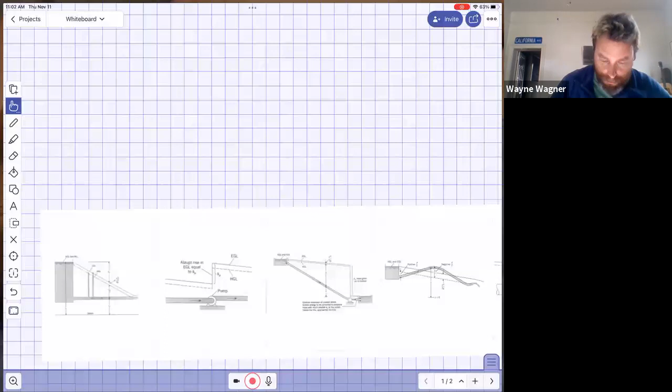Okay, let's go here. All right, so I've got a whole bunch of examples down here, which we're going to get to, but let's start over here.

So the title of today's lecture is HGL, EGL, and that stands for the hydraulic grade line and the energy grade line. We'll talk about that in a second. They always get mentioned together.

Yes, you're a very good dog, but I can't go right now. I might be playing fetch with my dog over this.

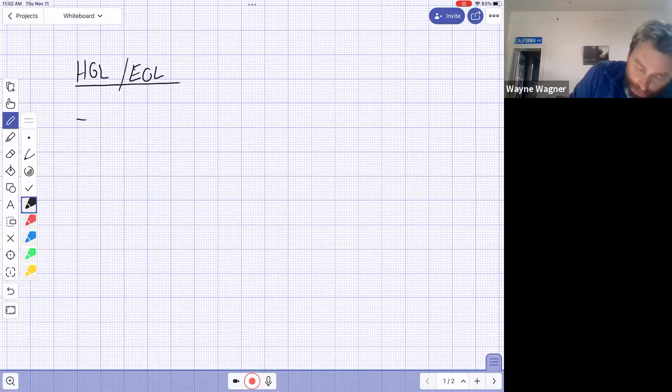Okay, so the purpose of today is we're going to construct the hydraulic grade line and the energy grade line for various fluid systems.

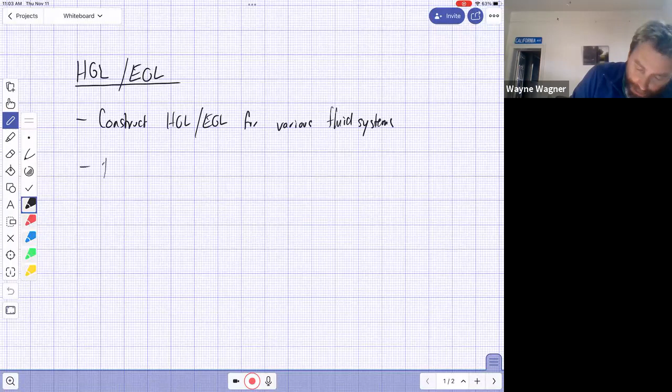And then we're gonna define and explain the physical meaning of the HGL, EGL. This is kind of all part of the same thing.

One thing I made a note of here, and I don't really remember why, but for some reason this needs to be known now. So we're just gonna go ahead and put this, just as an aside, I guess.

Okay, head loss. Remember, head loss is just you lose energy due to friction, or viscosity, or whatever the reason may be, in an expansion.

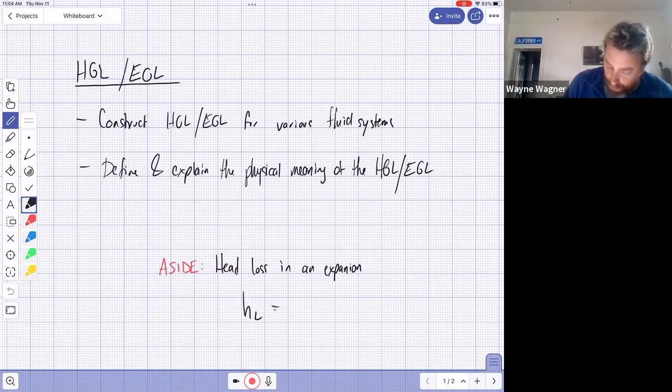And that is defined as head loss equals V1 minus V2 squared over 2G. So that's just something, I don't really know where that's going to show up. I just have it in my notes and wrote it down right here. So it's important that we have that. I don't remember why.

All right, so basically what we're gonna get to here is the reason why. So there's a few different ways you can write the Bernoulli equation. I even put that in one of your homework assignments, like what does it look like if everything is written in terms of pressures, or everything is written in terms of lengths, or everything is written in terms of energies, or whatever.

And right now we're going to talk a little bit about why we always think about it in terms of heads, okay, or lengths, I guess. So one of the ways... Okay, can you guys still hear me? I'm sure you can, right?

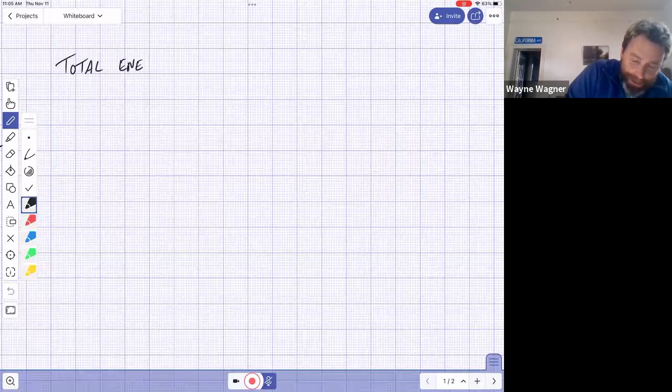Yes, okay good. Okay, so I tend to think of this as like the total energy in a system, as being, well let's see, TE equals P on gamma plus Z plus V squared on 2G.

So you remember this from the Bernoulli equation, and we've been using it in the energy equation. This quantity right here is often just defined technically as the EGL, energy grade line. So the energy grade line is just your total of these three things. But it's not really energy, but it could be converted to energy by just some algebraic manipulations.

It's just, we're just keeping track of our three forms of energy, essentially: potential energy due to pressure, potential energy due to elevation, and potential or kinetic energy. So we're basically just keeping track of these three things. Okay, the total energy in a flow generally...

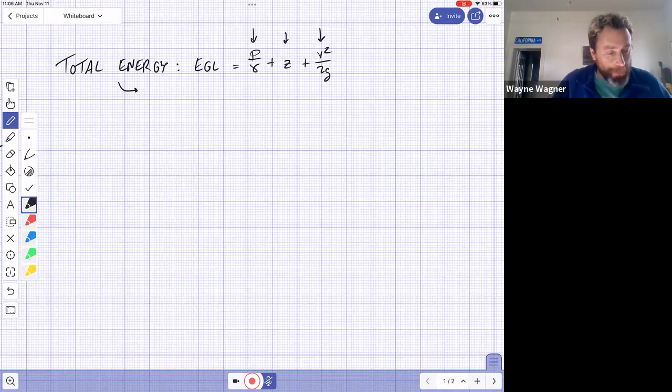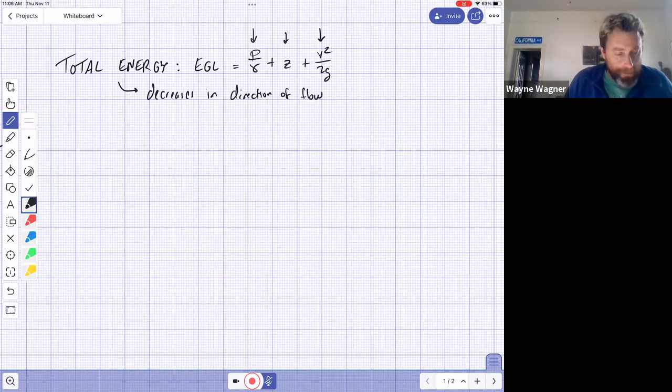It decreases in the direction of the flow. Okay, why would it decrease? Why do we lose energy in the direction of the flow? Is it friction? Friction, right, due to head loss.

Okay, so you got friction, you're gonna lose energy. That technically you're losing the energy due to heat. It's not really a lot of heat, it's not really gonna heat up your water or your fluid. I guess it depends on how little fluid you have, but generally in the direction of flow it decreases unless... what could cause the amount of energy to increase?

If it's flowing to a higher area or a higher height, it would... No, because if it goes to a higher area, then what's gonna happen is it's gonna lose pressure or it's gonna lose kinetic energy. So it's either gonna slow down or it's gonna lose pressure. I guess inside a pipe, it'll just lose pressure.

But good thinking. Could I have a pump? Pump, yep, unless there's a pump.

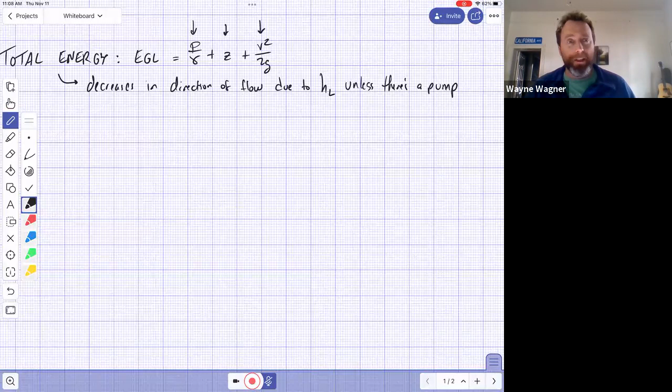A pump, okay, so unless you add energy to the system from outside, it's always losing energy. That's not just a fluids idea, that's a general idea of all the physical world. Unless you add energy to the system, it's always going to lose energy.

So this is the total energy, and that's the EGL. You're going to have some piping system, and we draw the energy grade line, a line describing how much energy you have at every location. There's another line we like to draw, the HGL, which is just the piezometric head. We don't use that term as often as I'd like.

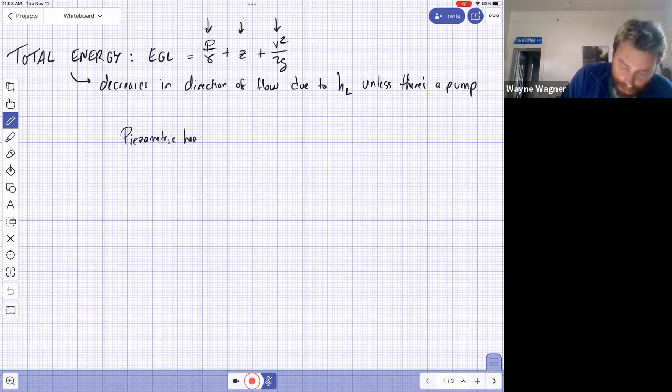The piezometric head, that's P on gamma plus Z. That's just the potential energy of the system, and that's the HGL. I'm going to erase the word piezometric head.

I'm going to write HGL, the hydraulic grade line. Now I'm going to give you an idea of what all this is. One key to remember is these are all measured in units of length, meters or feet or inches. P on gamma is a length, Z is a length, V squared on 2G is a length. It really makes plotting these things nice.

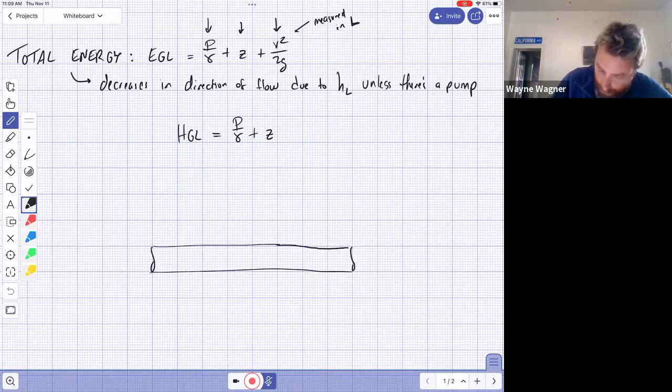So one typical way we do this is we imagine we've got a pipe. Actually, I don't know if this is a typical way people do this, but it's the way I like to think about it. We've got a pipe, and I'm going to put a little piezometer right here.

So I'm just going to consider this system. I've got a pipe going right here, and let's say I've got a little piezometer right there, and a little piezometer right here. Let's take some points here. The first thing I need to know is I'm going to keep track of three quantities.

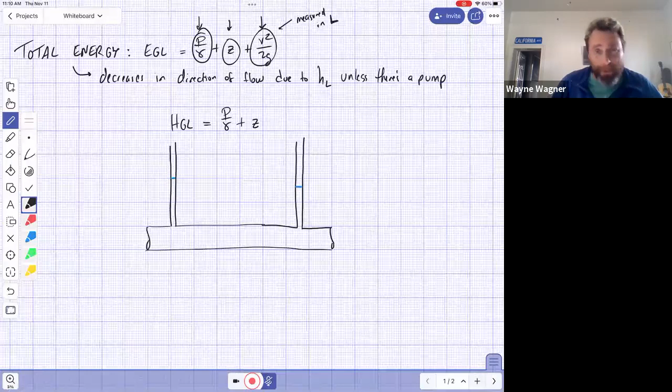The Z in the system, well, in order to know Z, we need a datum. I should be doing this with a ruler, it'll make my drawings much better. Let's go ahead and do a ruler, plus I noticed in the videos it makes a really cool noise.

So here's my datum. If I decide this is my datum, and I'm curious about a location right here, this is Z. Z is easy to figure out. That's Z. Suppose I'm looking for a point right here, this is Z.

Now Z is the easiest one. Now I want P on gamma. Well, we could use hydrostatics and do some manometer rules if we wanted to, but it's easier to just remember this: this is P on gamma. If we wanted to do manometer rules for that, let's see here.

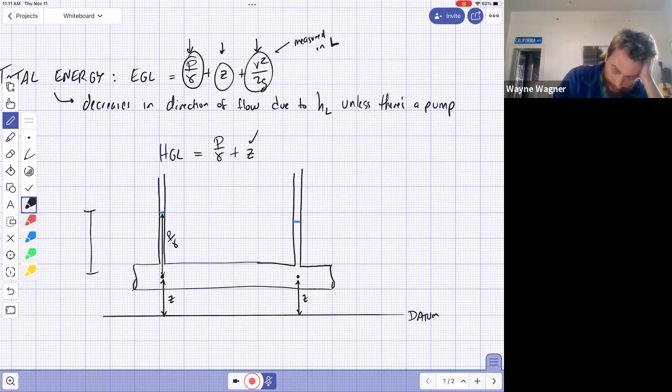So this distance right here, up to there, if we call that H, we can say okay, I'm going to start here. Got P atmosphere, I'm going to do a manometer rule. So I'm going to add as I go down gamma times H. That's going to give me the pressure at this point equals the pressure at that point. If we make this gauge, it goes away, and then I end up with H equals P on gamma.

So this height right here is P on gamma. Does that make sense?

Yes. I'm hopeful that this manometers stuff is becoming second nature. Lord knows we do enough of them in this class, they show up again and again and again. You guys as a class have done better on manometers than I think I've ever seen in my classes, so you're to be congratulated on that. It fires me up.

So anyway, here's P on gamma. Now the next thing I need is V squared on 2G. I don't know what V squared on 2G is for this problem, there's no real way to know, I'd have to just make something up, and we will. So what typically happens, if you remember, we talked about pitot tubes. I'm going to draw one out here, only because P on gamma is in the way. But if I imagine I've got an opening right here.

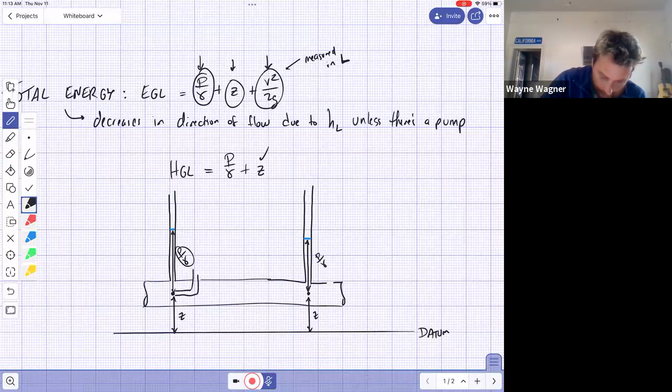But anyway, so this is now going to raise, it's going to be above. This is where P on gamma is. It's going to be above that by a certain amount, and that amount is V squared on 2G. So maybe that pushes the water up to here.

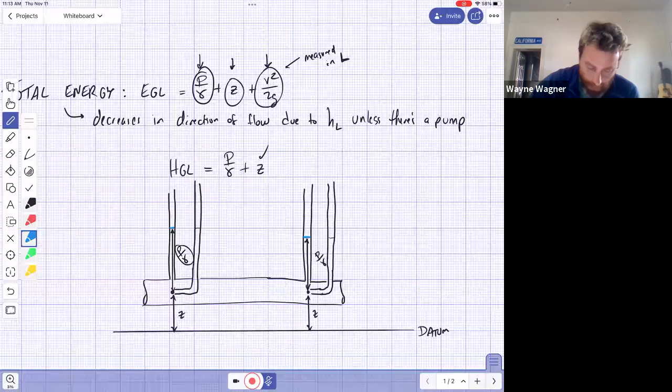And so what I know about V squared on 2G in this case is that this pipe has the same diameter all the way through. Because of that, I know it has the same V squared on 2G over here. So maybe that jumps it to about right there. Now I've got this distance right here, that's V squared on 2G. This distance right here, that's V squared on 2G.

Well, I guess technically it's defined right here because that's the point. Okay, sloppy drawing. Anyway, give me one second, I got to fix this drawing. Why does it keep giving me the wrong eraser? All right, so what I'm going to do is just slide this over, so it's going to come in right here and go up this way.

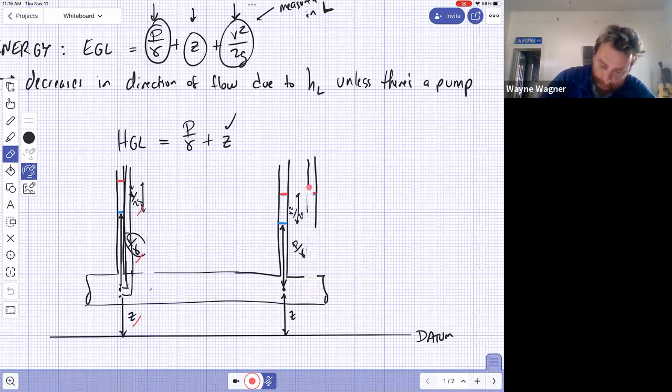That's our V squared on 2G. Do the same thing over here. I think you get the point, but I didn't want these to be at different locations because that kind of screws everything up. Okay, so like right in there, maybe. Oh no, it was right there. Okay, sorry about that, that was red, I believe.

Okay, so we're like right in here. All right, so this is the EGL right here, because that's the sum of the Z, the P on gamma, and the V squared on 2G. This is the EGL right here. And if we assume, as is generally a pretty fair assumption, that we're kind of losing that energy at a steady rate, it looks like this.

Okay, so that's the EGL. The HGL, okay, it looks like this, right? We're just going to connect the blue lines, because it's everything except for that V squared on 2G. So this is the HGL.

All right, so the difference between these two is V squared on 2G, which in this case I know is a constant because the diameter of this pipe is constant, so V squared on 2G has to remain the same. Notice the elevation here, the Z's, it was constant because this pipe was horizontal. So all that energy we lost in terms of head loss, going from point 1 to point 2, it had to come out in the pressure. So we lost energy, and really it showed up in the pressure.

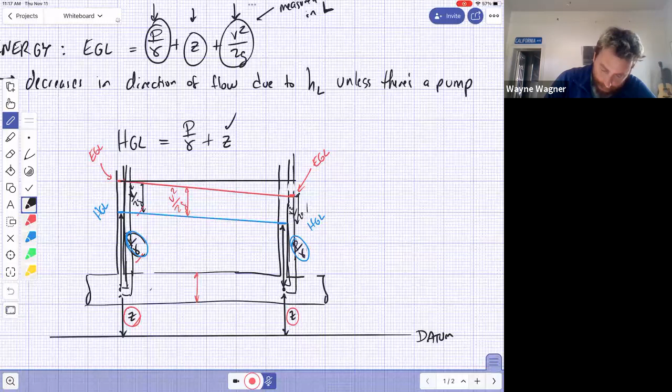How much energy do we lose? Well, the easy way to get at that is to draw a line perpendicular, horizontal, like this. And this right here, this is the head loss. That's the amount of energy that we lost.

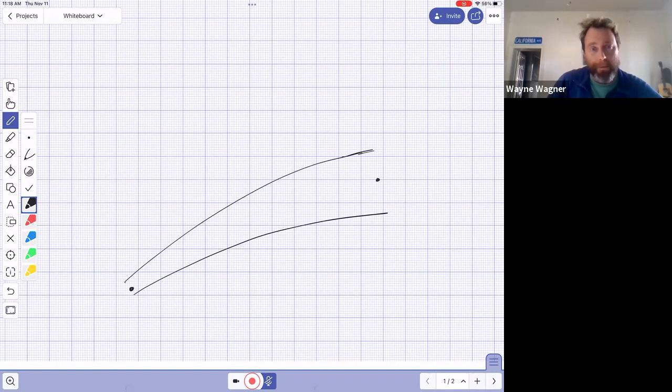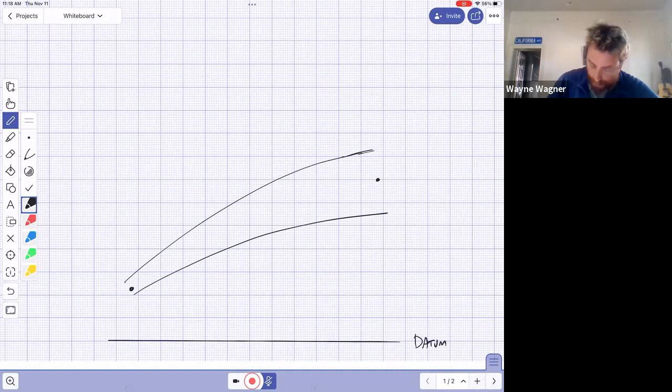Okay, so this drawing, this is the easiest this would ever get. It'll almost never be this easy. I'm going to draw you a slightly more complicated version, with a pipe—I can't remember how I draw this pipe, but it doesn't really matter. Let's suppose we've got a pipe that looks like this, gradually getting larger, going from a point over here to a point over here. Okay, so let's see what we've got here. Here's the datum. Here's Z.

Okay, now the pressure. Well, I don't really know, I'm kind of making up ideas here. One thing I know is that I'm going to lose energy in the system, right? So the EGL, wherever that is, let's suppose it starts right here and goes to some point here. I know I'm going to be losing energy, so the EGL has to go down. Technically that line would actually be concave up, but we'll deal with that later, let's not deal with that just yet.

The pressure down here. So the other thing we know is, sorry, I always work from the top down. So this is my EGL. Now this is a closed pipe, so the velocity down here, the velocity head is going to be really low. Low V squared because it's a rather large pipe. So if V squared is low, then the distance down to here, this V squared on 2G down to the HGL, means these things are going to be relatively close to each other here, and relatively farther away over here.

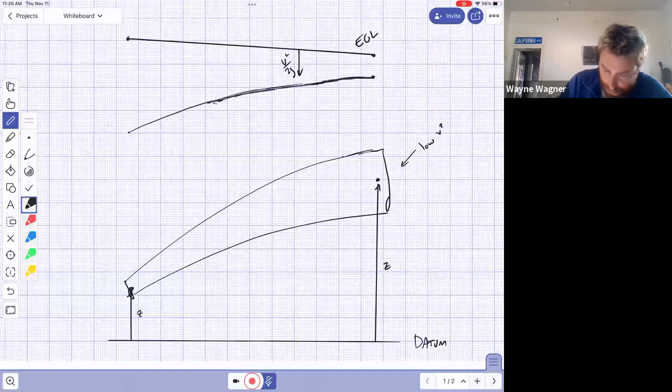So maybe right here, this is going to look like, imagine I put a little curve in there, but not too much curve. What I care mostly about is that you guys get, well, we'll talk about concavity later. Okay, so this is your HGL. The difference between those two, and the way you figure that out, is by doing V squared on 2G. Notice it's slow moving over here, so that means this is small. It's fast moving over here, so V squared on 2G is large.

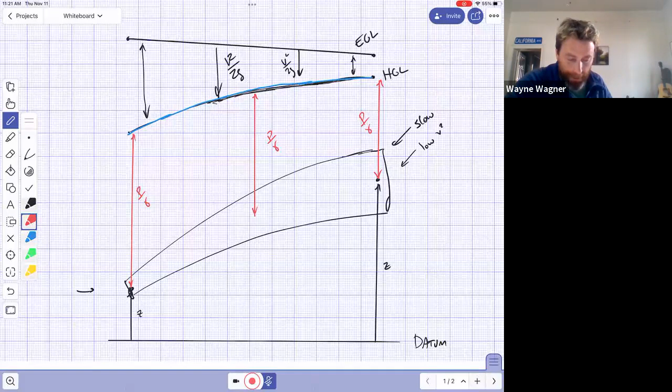So what does that leave in the middle? Pressure. Here's our P on gamma, and obviously it could be right here. So now we've got our three things that add up. Here's our HGL, which is Z plus P on gamma. And then the EGL is everything: Z plus P on gamma plus V squared on 2G. That's how we figured this out.

Now what I want to note that's kind of interesting about this is a few things. So here's our Z down here. Note that if I were to move directly upwards in this flow, let's suppose I was right here, my Z would increase some, and my P on gamma would decrease. I'd have the same amount of energy, it's just that it would be in elevation instead of pressure. And this V squared on 2G at those two points is the same, still the same V squared on 2G between those two locations. So moving vertical doesn't really affect it.

You know, Rocky, shh, we don't need growling. Growling is for mean dogs.

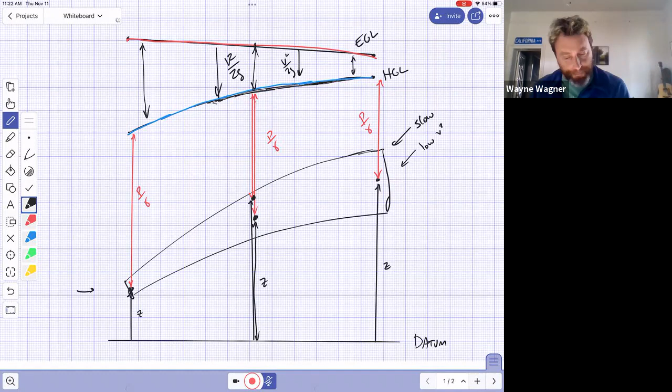Hey, stop. Okay, so that's the idea behind these things. So when you have to draw these, today we're just going to look at a bunch of pictures, but when you draw these, what I recommend is draw the EGL. Usually that's pretty easy, right, because basically it's just going to slowly drop. Give yourself enough room to draw underneath it, but it's just going to slowly drop.

Unless there's a minor loss, and we'll talk about that in one second, unless there's a minor loss or a turbine, in which case it will drop fast, like in a discrete step. And then you draw HGL, by just imagining or calculating, depending on the problem, V squared on 2G. Last, draw Z. Once you've got those three, then you've got everything in the whole problem, everywhere, which is pretty cool.

Okay, so today we're just gonna look at a bunch of pictures. I think next class, can we do all of that in one class? Probably not, but we'll talk about that.

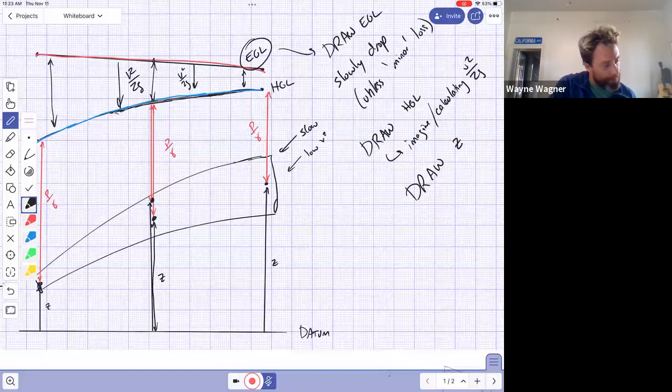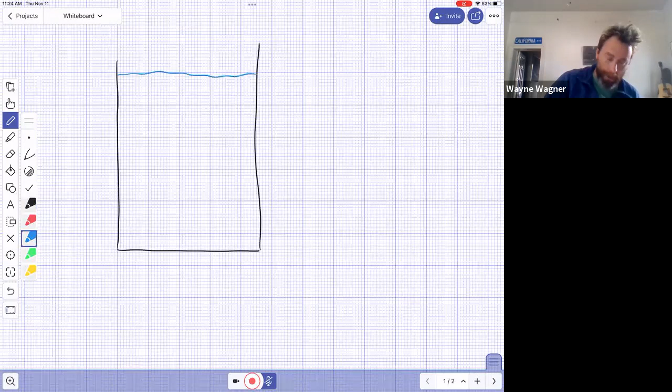All right, so let's go down here. These are from a different textbook, a textbook I used to teach out of. Okay, first let me start with one thing real quick. If you have a reservoir in your problem, so if at the beginning of your problem you've got a reservoir, if anywhere in there you have a reservoir, I don't care if your point is here or here or here or here, right? V squared on 2G equals zero.

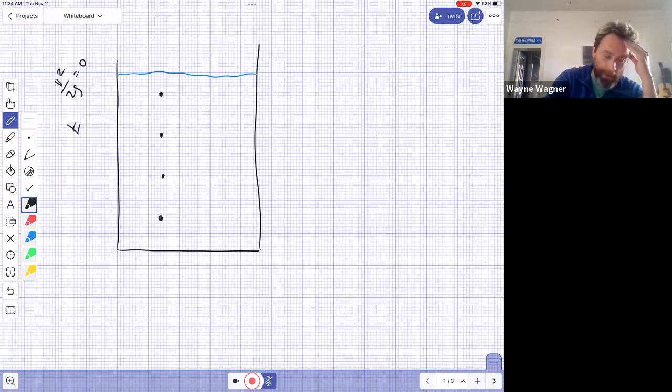Okay, which means if V squared on 2G equals 0, then V squared on 2G is the difference between the total energy for the energy grade line and the HGL. So this means the EGL equals the HGL.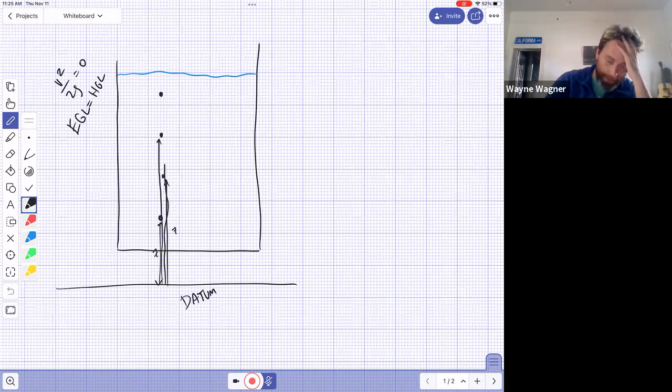Okay, which means if I draw a datum down here, then this is Z for this point, this is Z for this point, this is Z for this point, and this is Z for this point, right? Easy enough. And that also means that this is P on gamma, this is P on gamma, this is P on gamma for that point, and this is P on gamma for this point. Okay, it doesn't matter, right? They all add up to the same thing.

But what's interesting here, of course, is that, look, you're higher in the fluid, so you have a lower pressure. Okay, which is kind of what we would expect. So in this case, the HGL and the EGL both are right along the surface of the fluid.

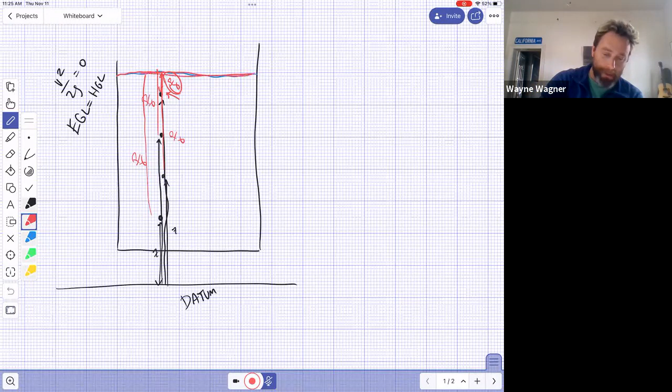So let's go over here and let's start talking about what that means. All right, so HGL and EGL. And please interrupt me because this is complicated enough. So what we're going to do is, I guess we should just be kind of standard here.

Let's make the EGL in red. EGL's in red. So I'm going to draw the EGL first. And I want you to kind of follow along with me and make sure that this makes sense. All right, EGL is right here.

Okay, now the fluid starts to move. I don't lose any energy due to friction or anything, or head losses, until the fluid starts to move. Okay, technically it starts to move a little bit before this entrance. If I had created this drawing, I would have made it kind of start to dip down right here. But, whatever, I'm not going to get that worried about that. We're just going to kind of follow along with the way the books do it.

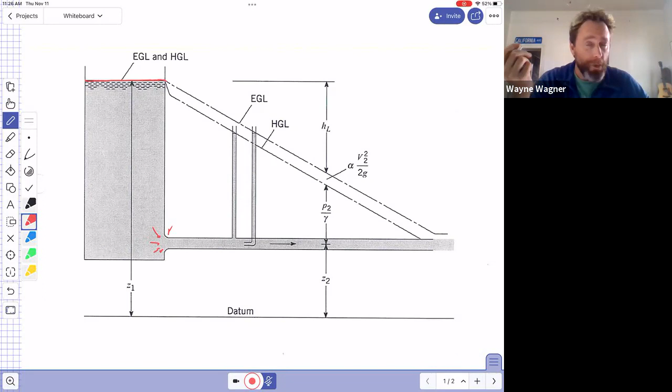So you get to this opening and now your flow is moving. So because your flow is moving, you're going to start to lose energy. Well, there's nothing different about the pipe here versus here versus here versus here versus here. So you're going to lose energy at a steady rate, and so we're just going to start dropping.

Okay, now the question is, how do we know where to end up over here? Like, why did they draw it with that slope? Why didn't they draw it with a slope like this, or a slope like this? Because it can go negative, and we'll talk about that in a little bit. But how did they know what to do?

And so what they did is they went down to this end point and they said, well, where are we going to end up? Well, this thing is exiting to the atmosphere.

Okay, so if we consider these things, P on gamma, Z, and V squared on 2G. Okay, when it's exiting into the atmosphere, this thing goes away. Okay, we still have a Z.

In fact, let's go ahead and draw that in here. Okay, they've already created the datum for me, so we'll just go ahead and use that. And then we've just got this V squared on 2G above that. So V squared on 2G, this has to be positive because it's a V squared on 2G. So they just said, well, this is going to be V squared on 2G, and that's the spot we're going to aim for.

Okay, when we draw this line, okay, so what is V squared on 2G? Well, if I asked you to draw this and I gave you no other information, as long as you ended up above this line, above this location, I would have to accept it. Okay, because I didn't give you any information.

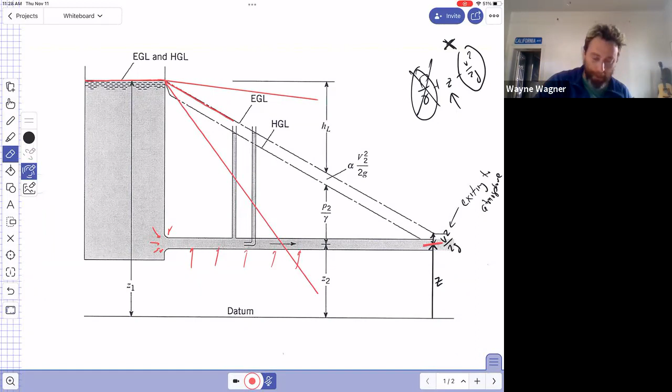This line right here would be totally wrong. Okay, but this line that I'm erasing now would be fine. You know, that line would be fine. I can't quibble if there's no information.

So basically we're going to lose energy and we're aiming for a spot V squared on 2G above that and Z. Okay, now, as long as you're above that and Z, and I don't give you any information, well then I have to accept it, right? Okay, so now this V squared on 2G, okay, so that's how you draw the energy grade line.

Okay, now a few things, yeah, that's fine.

You'll note the head loss in this case is really huge, right? We lose a ton of energy due to head loss. I'll explain that in a sec. Well, I'll explain that right now.

Before we get to that, what if we did not lose that much energy? Like, why do we have to lose that much energy? Well, what happens is this: your head loss, the amount of energy you lose, is a function of velocity. So the faster you go, the more energy you lose.

So if you didn't lose a lot of energy, let's imagine you lost very little energy in this problem, and so you ended up in a location like this. When you exited, you just had this insane surplus of energy.

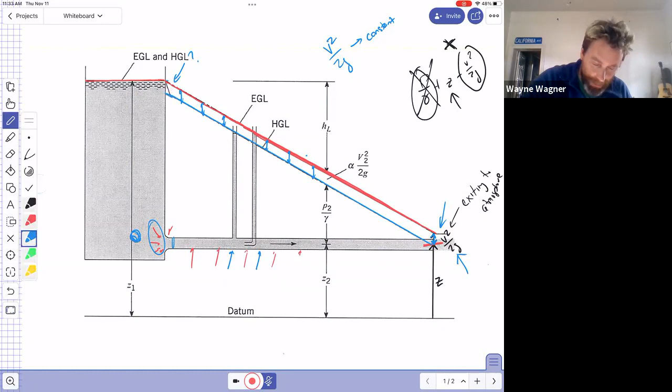Well, what's happening is that V squared over 2G is ramping up. It's going from zero velocity to whatever the velocity is in the pipe down here. I don't particularly need you to draw this little bit. Usually when I draw this, I just have it go in like this and then just draw a little drop off like that.

Technically, and they don't draw it in this picture either, but technically there is a head loss right here, which we're going to call h with a lowercase l. There's a head loss right here, which means you lose a certain amount of energy because the flow conditions are changing. So anywhere where there's something, in this case an entrance, there will be a head loss, and that's what we call a minor loss.

And we'll talk about those as we go. But in these drawings, they never draw an entrance loss. I will ask for you to show me the entrance loss.

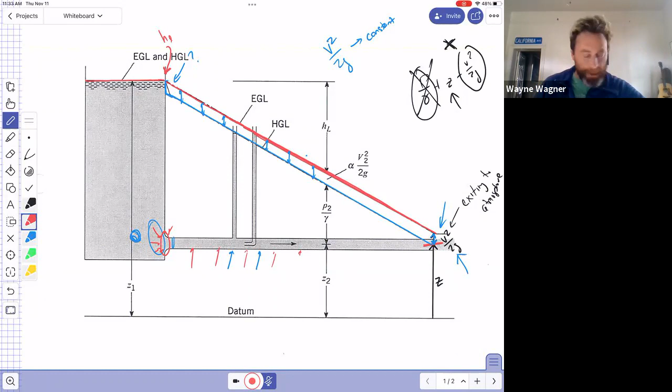So what you'll do for the entrance loss is it'll look like this. This is your EGL, and you'll be like, oh, there's a head loss right here. Boom, there's a head loss. And now just draw it as before. Okay, so this is a head loss.

It's just an acknowledgment. I want you to acknowledge, I know that there was some kind of changing in the piping system. Something happened. If something happens, there's a head loss. Again, it could be anything. You could change from one type of pipe to another. You could have a fitting, you could have a valve, you know, whatever.

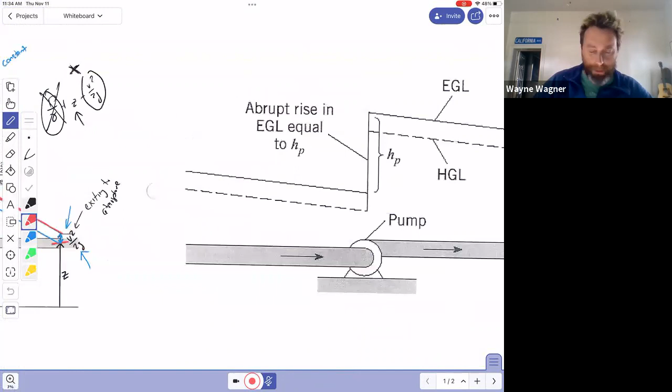And we'll talk about all those things as we go through today. Okay, here, this is what happens if you have a pump. Okay. Oh, wait, any questions on this? No, sir. Okay, cool. All right.

Let's see this one. All right, so we've got a pump in your system. So this is one of the ways that they'll draw a pump. And again, your energy grade line, we're going to assume these pipes are the same. So you're going to have this constant loss of energy.

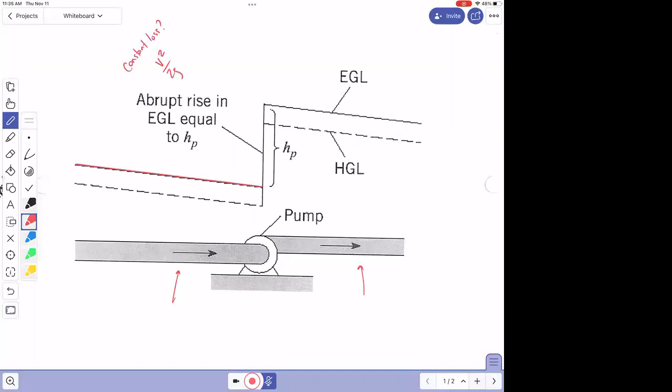Boom. Now, how do I know it's a constant loss of energy? Okay, well, there's two ways I know. One, V squared on 2G is constant. It has to be, because this diameter of pipe and this diameter of pipe are the same. Okay, any other way? If one of the velocities was higher or lower than the other, it would break the conservation, it would break continuity, law of conservation of matter.

Okay, staring at the drawing now, it suddenly doesn't look like they're the same, but let's assume they're the same. The other thing that we know is that if they're the same pipe, the friction on the sides is the same. So if this one's made of concrete and this one's made of concrete, and they have the same velocity moving through them, then they're going to lose energy at the same rate. Now that won't be the case if this one were made of glass, for example, because then all of a sudden you've got a much smoother surface. It's going to be less frictional, and you're going to be very happy.

All right, so here's my EGL. So what happens is we hit the pump, and what I want you to think about when we hit pumps is, okay, that means basically I'm just adding energy. Okay, so this EGL. Don't worry about the HGL. Don't ever worry about the HGL until you've drawn the EGL. That's going to be the rule. I should just say that 50 times a day. Don't worry about the HGL until you've drawn the EGL.

So here's the EGL, it bumps up, right? So usually what you'll do on your diagram is you'll label that HP. So if the pump adds 50 feet of head, then HP is 50 feet and this line goes up by 50 feet. And then of course, we're going to start losing energy again because we're just flowing along a pipe, same diameter pipe, made of the same stuff. We'll talk about how to figure out exactly how much it loses. We'll get there.

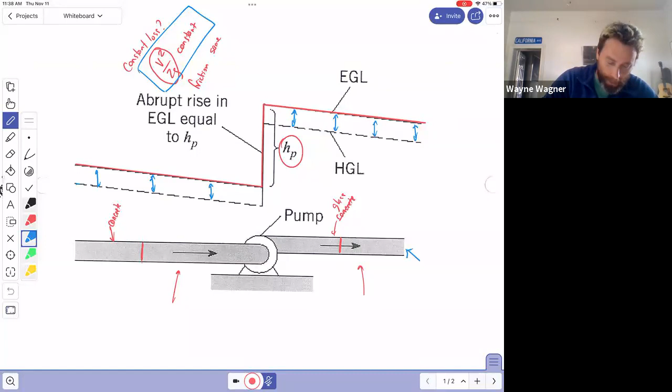I did that for many years. I even started teaching this class that way. And then I realized, whoa, if you have the EGL, the HGL gives itself to you. These are all the same number. It has to be. It's the same distance because it's a constant diameter pipe. So then all we need to do is draw a line that is the same distance away from the EGL the whole way. Okay, and that's what we're going to do.

All right, so there you go. That's our HGL. Now what does this tell us? It tells us some really cool stuff that I find very interesting because it's surprising to me.

V squared on 2G is constant. That's a surprise because normally when you think of a pump, you think the fluid is going to come out much faster than it went in. But unfortunately, that's not the case. It can't do that. There's nowhere for the water to go.

But what it does instead is notice, so if I draw a datum, here's my datum. My elevation is relatively constant before and after the pump. It does look like the exit pipe is a little bit higher. So this is my Z.

And then my P on gamma. Notice my P on gamma, my pressure was decreasing all along the pipe. This is my lowest pressure right here. And then all of a sudden we get the pump and boom, my pressure goes through the roof. So what the pump often does is it really just increases the pressure.

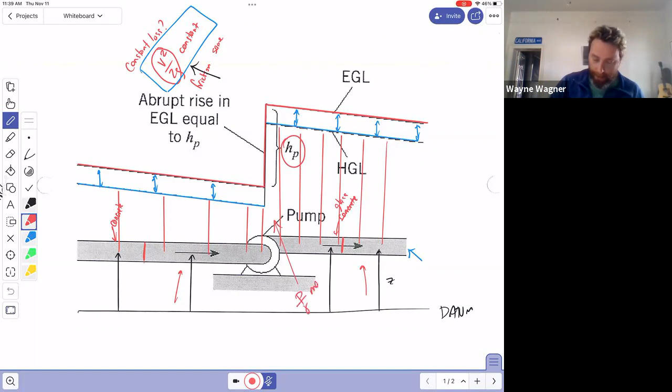So your max pressure in this drawing is right here, just on this side of the pump. So this is P on gamma max. Noting that right here, this is P on gamma min. That is often the case.

And in fact, usually this is a big concern when creating these systems: a lot of times you need to make sure that where you put the pump is before the fluid cavitates. So often right before the pump, this is where cavitation is a risk, because the P on gamma is a minimum.

Now, in this case, the P on gamma is always positive, so we're not really going to worry about that. But if the P on gamma goes negative, then you should check. It's still probably not going to cavitate unless it goes really negative, but something to consider. You don't want cavitation; it will screw up your pump. So don't let cavitation in.

Okay, so let's go over here. We'll do another one. Oh, here we go. All right, we've got two reservoirs.

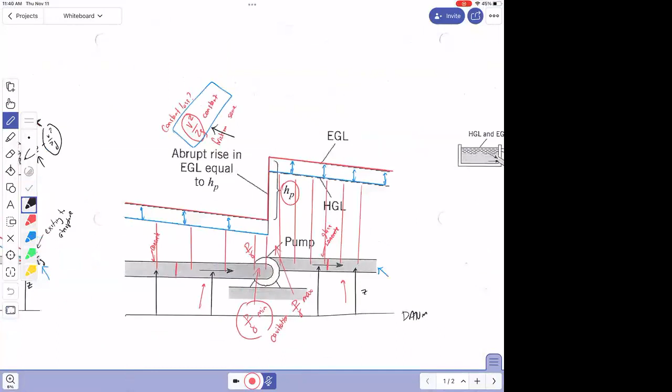Can I ask you something? You always can, I just know you're kind of in a flow. So I wanted to ask you, I was thinking in a practical way, in layman's terms. If a certain amount of water goes into a pump and that pump has a quote unquote continuous flow, the pump runs at a certain RPM because it has a motor in it. So when we're thinking about pressure and power and all those things, and you said that a pump adds energy, is the entire point of a pump to either lower the energy or to only increase the energy?

Only increase the energy. If you want to decrease the energy, well, if you only want to decrease the energy, I would think that you would just put in a reservoir somewhere in the middle. And what will happen is that'll suck all the kinetic energy out of your system through a head loss. Usually instead, what would be better if you want to lose energy is put in a turbine, and then you can actually collect the energy that you remove. Okay, and that's so really a pump and a turbine are like flip sides of the same thing, right?

Right. You know, I'm really flagging right now. I need some water, hold on. I'm getting sick or something. Whew. All right, you know, it's really strange, as I get older, my back will start hurting and painful, I need to stretch. And then 3 days later I get sick, and I'm like, I wonder if that's connected.

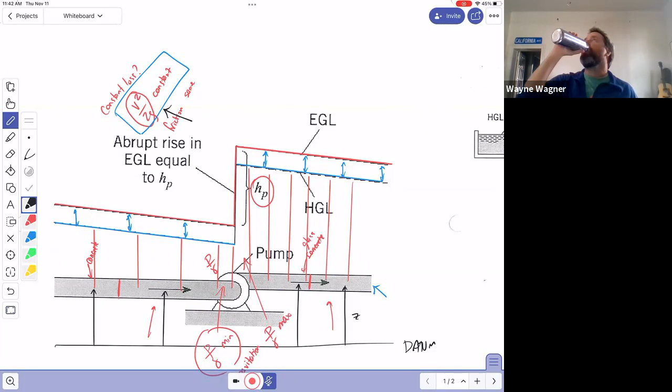It's gotta be. Probably. I appreciate you answering the question. I was curious, as we were discussing head loss and pressure and flow rate and all of those things, how a pump practically fits into those kinds of things, not just the numbers, but how you can use the terms we are learning about in a practical way to explain why we even have a pump or don't have one.

Yep, I appreciate it. Yeah, so what will happen in general?

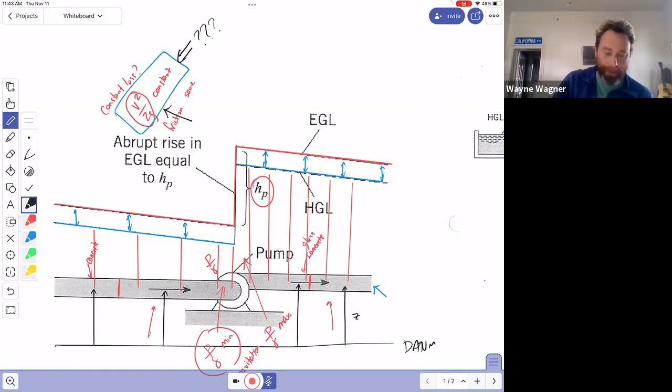A lot of times it's like, well, what about this v squared on 2g? How is it the pump doesn't affect that? What it actually does is affect the v squared on 2g, but it doesn't change the fact that the v squared on 2g is constant. So if you have a pump, you have more total energy, which means you can flow through the pipe faster everywhere. It'll make a higher velocity flow, but it won't change the fact that the velocity here and the velocity here have to be the same if those pipes have the same diameter.

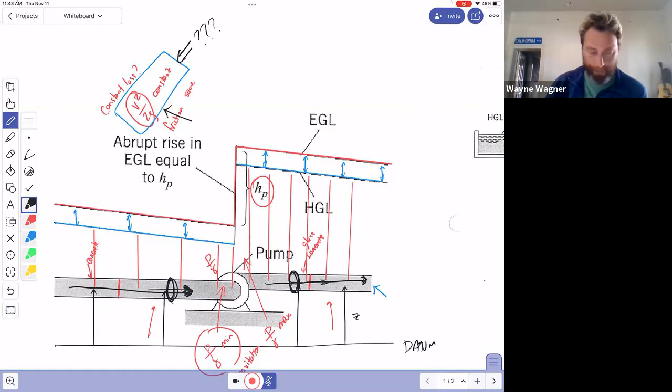That's cool, I appreciate it. Okay, let's go over here. No, this is why we're discussing, right? This is important stuff. This is the whole point of this class. This is just the intro class. When you guys take the next one, Hydraulics, they're going to get a lot more into these sorts of things and really get into the systems. This class is more sciencey, more theoretical, which I like better anyway, because I think that's why you go to university, to get all the theory. You'll learn the practical stuff on the job, but without the theory you can't figure out something new. If somebody throws something entirely different at you that you've never seen and can't look up in a book, you can't figure that out if you don't know the theory. So you need both.

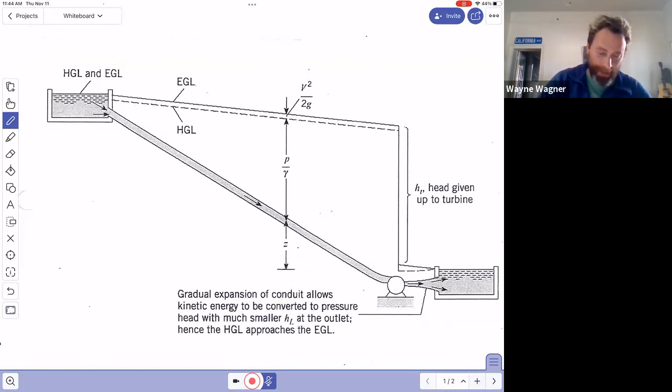Anyway, okay, so here we go, HGL and EGL. We're gonna start again with the rules. What did I say? Don't draw the HGL until you draw the EGL, or something along those lines. I need to come up with a song or something. Anyway, HGL and EGL, they're both gonna start right at the surface here because there's no velocity.

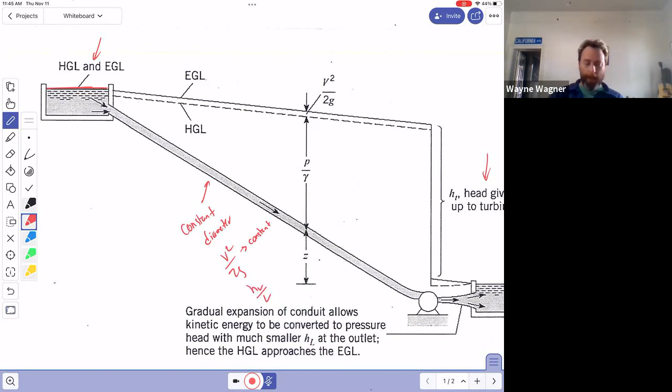Now normally I would draw a little head loss right here if I were drawing this, and I would expect you to, but this drawing doesn't have that, so we can't do that. So now we're going to draw a line, assuming this is going to lose energy as it goes from this reservoir to that reservoir. It definitely is, right? And we notice we've got a steady pipe, a constant diameter pipe, so that means v squared on 2g is going to be constant, which means our friction, our head loss, is going to be at a constant rate. So I'll call that head loss per unit length of the pipe constant, meaning we're going to have a constant downward slope throughout that pipe.

So again, that's great, but where do we draw this thing to, right? It's like, okay, you looked at this, it all made sense to you, so then you're like, okay, am I going to draw my line here? Am I going to draw it here? Am I going to draw it, you know, like here? This is the question, right?

Now note, I never draw them going up. They cannot go up. That breaks all kinds of rules of thermodynamics. That would imply there was like a continuous pump along the pipe or something, I don't know what that would mean. The HGL cannot go up unless there is a pump.

So, you know, I had that good comment earlier. It's like, what could cause the energy to go up? And it was like, oh well, if the fluid goes up, that doesn't cause the HGL to go up. That causes Z to go up, but something else must go down to accommodate for that, and you still lose energy.

So okay, come on, what is wrong with this thing today? So this one is right out, if it will allow me to erase it, which apparently... all right, so now, okay, alright, so maybe I won't erase too much today since it doesn't really want to let me do that.

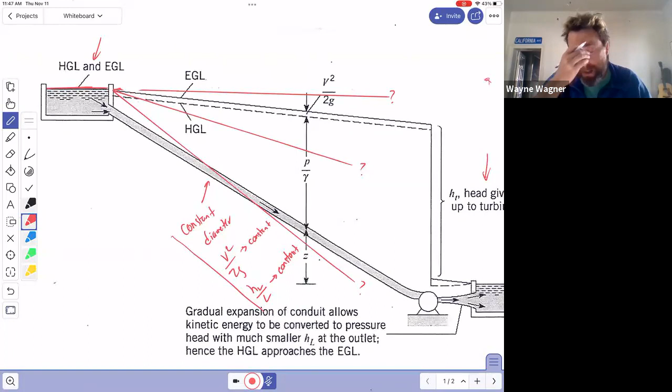Does it do that? I don't know. But one thing we need to remember is that this thing right here is a turbine - this was not clearly drawn on here. I will either tell you that something is a turbine or draw a T on it, that's how I do turbines. I do pumps like this, circle with a P. For some reason it's not taking today, maybe this pen is dying. Anyway, so there is a head loss due to this turbine.

So what I typically do in this case, if I don't know how to draw that line, is work backwards. I'll come in here and go, okay, I know the EGL is going to be here on the back end. Technically there's a head loss right here, but I'm not drawing that right now because this is kind of a weird system - I'm just following the textbook example, which didn't include those. And then I'll note that this pipe is expanding.

So it's really wide right here, and it's narrow right here. Where it's really wide, V squared over 2G is very slow. So V squared over 2G is low, which means the rate at which I'm losing energy right there is very low. So that means this line is going to be relatively flat.

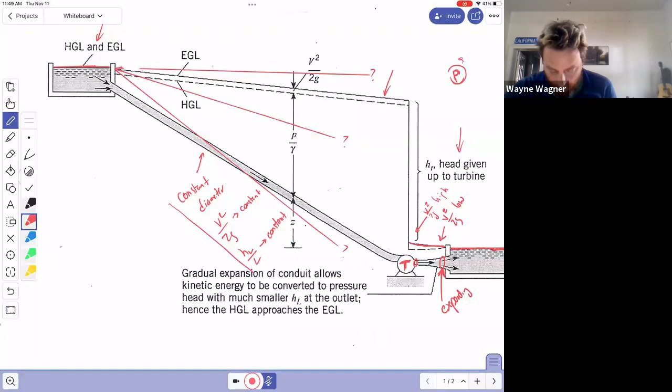So it's just a little concave up. What I ask you to do on your papers is you write concave up, so it's curving upwards. So then what you do is say, oh, I've got a turbine, so that's a head loss. And this turbine, in this case, they drew it like it's taking a tremendous amount of flow out, or a tremendous amount of energy out. You could have drawn any length of line you want here, as long as you have a line.

I've had people turn this in and decide that the turbine is taking that much - that's just a crummy turbine, but that's okay. As long as you know that the turbine causes you to lose energy in the direction of flow, I'm okay with it. So these two lines right here, either one would have been fine as long as it matches up with the top of this turbine line. So the turbine is going to go up, and now I'm just going to trace out what they drew, because we're going to assume that I chose that particular location. I didn't choose any particular location, I'm okay with all of them.

It's okay, but you couldn't have gone negative down here, because it just can't happen. So here we go - red. Here's my EGL. Again, always draw your EGL, don't draw your HGL until you've drawn your EGL.

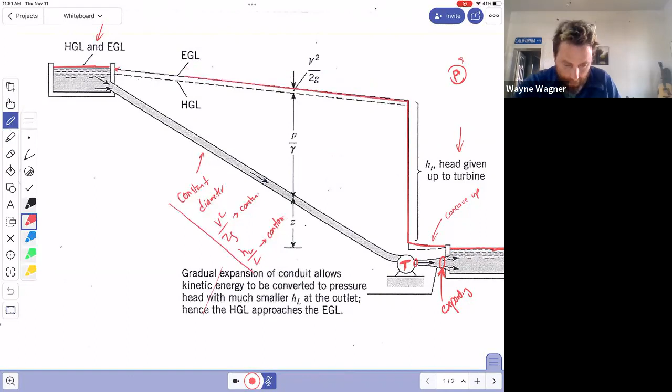Okay, once you've done that, all you have to do is figure out what V squared over 2G is. We already said that it's constant because we have a constant diameter pipe, at least for that pipe section. So the HGL is always going to be equidistant below that.

And you're just kind of making an artistic decision about how far below. You could have drawn it there if you wanted to. I usually do this, but you could have drawn it down here if you like, if you wanted a little bit more space. That's fine, there's no information here telling us exactly where to draw it.

What's key is that these two distances keep the same distance all along. That's all that matters to me. If you get that, then I'm good. I'm going to go ahead and erase that now.

Because we're just going to kind of keep with the book solution here. Okay, so then we've got to go down here.

Notice now this is a little bit more complicated, right? Right here it's really slow, so V squared over 2G is small, which means the HGL and EGL are going to be very close together. And right here, they should be about as far apart as they were up here, because that pipe is about the same diameter, so it's going to be kind of like that.

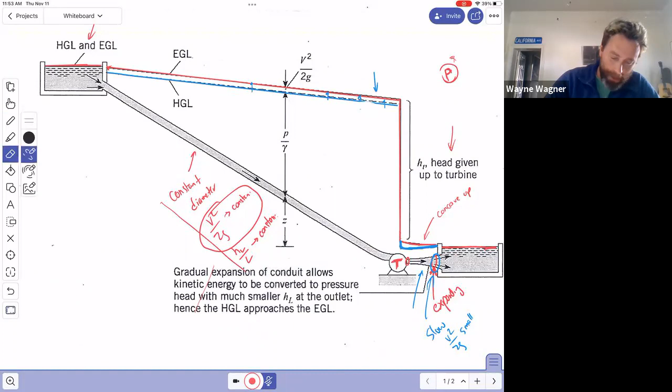Now the interesting thing here is this. Well, there's a few interesting things that I like to think about with this. Okay, so once we've done that, any questions on that?

I'm assuming you guys were thinking about those lines and trying to figure them out while I was working. But notice, as you move along the flow, Z, you're losing elevation. So you're losing this form of potential energy, but you're gaining pressure head. You're gaining pressure, you're losing elevation head.

And that's kind of happening directly because of each other. Now you're still losing the total of those two, because this is constant. So all told, if you add these two up together, you're losing -- you're not gaining as much pressure as you are losing elevation. But you are gaining pressure because you're moving downward in the fluid. It's just hydrostatics all over, except it's not static.

The thing to think about here with this turbine is you're stealing as much energy as you can. You've got a really large turbine, you're taking as much head as you can. If your turbine took less head, suppose you only went up to here -- suppose when you're drawing that vertical line, you stopped right in here. Well, that's fine, right?

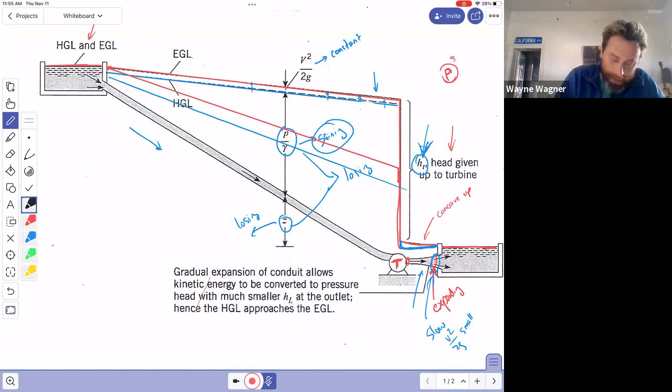Now there's no reason to have that happen, it's just kind of like things that you might want to play with. If you're designing your system, you're going to play with how much HT you take. I will note that if you remember, the power that you get from a turbine, the power that you remove from the system looks like this. So there is a trade-off here.

If your HT is this right here, H sub T, then H sub T is relatively small. However, by leaving energy for the fluid to flow and getting a larger V squared over 2G, you're going to get a larger Q. So it's a trade-off.

I would solve this personally with a little calculus, but I think there's a lot of curves that most engineers use, and they just kind of stare at it like a turbine curve or a pump curve to figure out how to optimize that. I'm a calculus guy, so I would use calculus, but we will not be talking about how to optimize that in this class. I think I asked it one time as a bonus question and nobody had any idea, but if anybody wants to talk about it, we could talk about it.

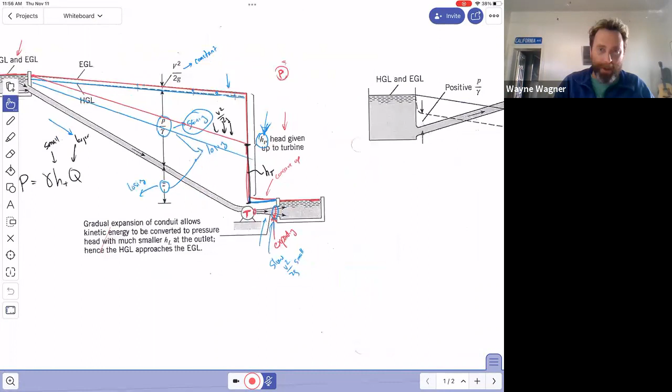All right, here we go. Any questions on this one before I move on?

Let's go to this one, the HGL and EGL. What I like about this one is it breaks all the rules of what we just saw.

What I want very clearly for you to see here is draw the EGL first. Don't mess with the HGL—it's going to confuse you until you have the EGL. So EGL, I always like to work from both sides.

From this side, my EGL is right at the surface of the water because there's no velocity. Normally I'd have a little head loss right here, but this particular book didn't want to deal with that head loss, so we'll pretend it doesn't happen.

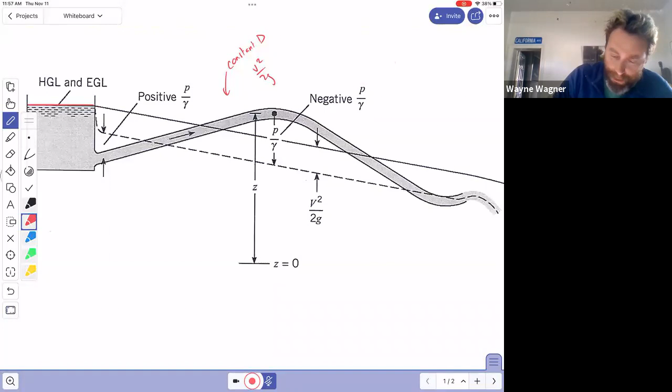Now I need to figure out where I'm going. Since it's a constant diameter pipe, that means constant V squared on 2G, which means constant head loss per unit length along that pipe—or that should be a capital L, head loss per unit length. So that means we have a constant slope. Great, but let's figure out where we're drawing it.

I'm going right here—this is where I'm heading. Here's my Z. So Z is here.

I know I have no pressure right there because it's exiting into the atmosphere, so that means I need to be above it some distance for V squared on 2G. Again, it's artistic license—I'll accept whatever you draw. For V squared on 2G, it just has to be positive.

It has to be above our exit because if it's at our exit, that means we're saying there's no velocity there, but there is velocity there. So we draw this slow, steady decrease in energy due to head loss, due to friction along those pipes. So that's an EGL.

All right, HGL. Well, we already know we've got a constant V squared on 2G, so let's just go ahead and draw a constant V squared on 2G—it's always going to be the same distance below. And we know in this case it's going to tie into this point right here, because there's no pressure right there, right? Because it's atmospheric, so it's going to go straight down. So that kind of determines where our line goes.

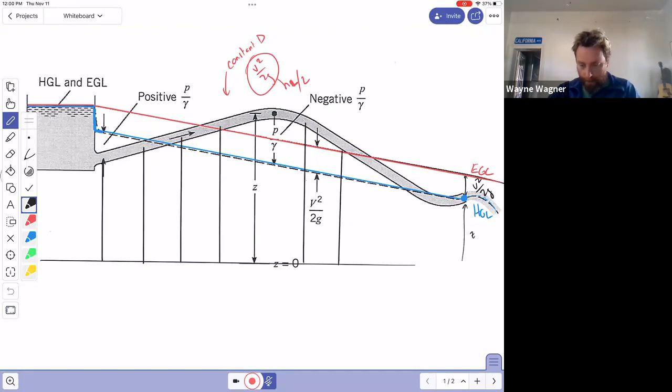So those are all Zs. Notice that EGL equals P on gamma plus Z plus V squared on 2G. So if the EGL, let's just throw out a number here, suppose the EGL was 10 and the Z was, say, 12. Well, that tells us something about P on gamma and V squared on 2G. Something has to be negative. If Z is above the energy grade line, something has to be negative.

Notice V squared on 2G is always positive, right? Because it's squared—this is always positive. I mean, that could be a 2, that could be a 4, that could be a 20, let's just say it's a 5. Well, what that means is that we've got negative pressure.

Okay, obviously I'm just making up numbers here, but I'm just making a point. If it goes above, then we have to have negative pressure. Okay, and now how much negative pressure?

In some ways I did this incorrectly because I should actually be thinking in terms of HGL. HGL equals P on gamma plus Z. And the same sort of idea: if Z is like 12 and the HGL is, say, 5, then we have to have a -7 right here. We have to have negative. So as soon as the Z goes above the HGL, we end up with negative pressure.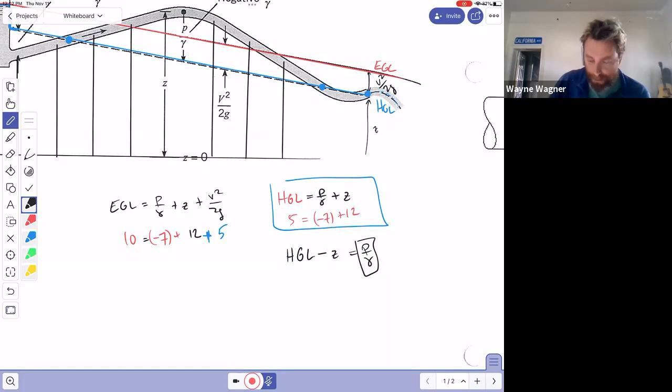So we're looking at a point right here, from that point until this point. Notice pressure is P on gamma. If I were to rearrange this equation: HGL minus Z equals P on gamma. So P on gamma is HGL minus Z. So it's the distance between Z and the HGL. So this is P on gamma.

Let's do it in blue. So P on gamma here, positive, here, positive, here... let's see, sorry, this always confuses me. Negative, negative, negative, negative, negative, negative. All along there, you've got negative pressure. So this is P on gamma, and it's negative for this whole section of the pipe.

So if you were doing a test to see if there was cavitation in this system, where would you test? The very top. Very top. So this is the lowest pressure, and that's where you would test.

And you've seen that in some problems so far. I think I gave you one this week, or maybe last week, there was a Bernoulli problem with a siphon, and it looked a lot like what we have right here. What they said is, this is going to be one of your points: point 2, point 1, and point 3. And the reason they care about this point is because that's where the lowest pressure is, and that's where you have to worry about things cavitating.

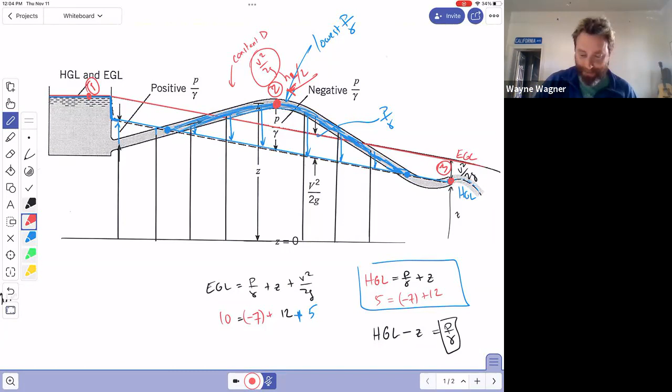Notice we've got constant diameter up until this point, which means we get constant V squared on 2G, which means we get a constant head loss per unit length. So it means we're going to have a steady downward slope. How much doesn't matter as long as it's downward. Again, this is all qualitative, so we can't really solve anything.

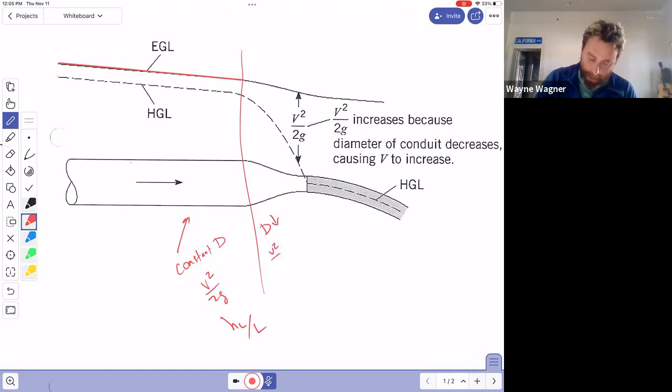At this point right here, diameter goes down, which means V squared on 2G goes up, which means the head loss per unit length goes up as well. However, it's going to increase, not exponentially, it's going to curve downwards. So this is going to go faster and faster.

We're going to have to get into the math to show you why, but this is going to need to be concave down. And that's kind of hard to draw. Concave down.

At this point, this thing exits, so this is a jet. Over here, they didn't do a very good job of showing that. This is a jet exiting right here. So we're not going to... anyway, we'll get to this when we get to the math.

So then for the HGL, well, constant V squared on 2G. So we decide on a value for the V squared on 2G, which looks like they decided that this was the distance for V squared on 2G, and they're going to hold that until the diameter starts to change.

Okay, so that's all V squared on 2G. Then what's going to happen is, well, the diameter decreases, so V squared on 2G is going to increase. So we're going to start drawing larger and larger V squareds on 2G.

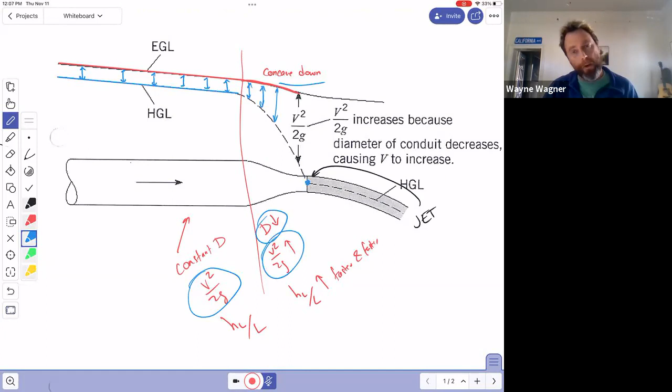And again, this also needs to be concave down, and we'll describe why. Anybody know why we end up right here? How did we know that we're going to end up right there? Pressure is 0.

Exactly. Okay, so if I erase all this stuff, and I think about, well, what is the HGL? Well, this is my Z, my datum, Z equals 0. So here's Z. And we know that there's no P on gamma, so we're just going to kind of keep cruising on until we get down to there.

That's kind of how you do that one. And the whole point here is to just think about what happens if we've got a contraction. And so that's all this is. And so this will be the max velocity at the exit, the V squared on 2G at the exit.

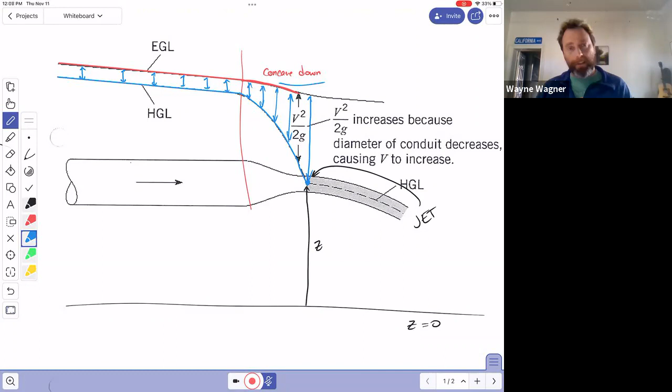Oh, another thing that I hadn't thought about, which is kind of a cool output of all this. If you puncture a hole in the side of this thing, if you just break a hole in this, and the water squirts out like a whale or whatever, it's going to come and stop right there.

It's not going to go any higher than that. If you were to puncture a hole in it and put one of these pipes going this way in it, and let that water squirt up, it's going to squirt up until it gets right there and no higher. Assuming the energy loss due to the entrainment of the fluid on the sides, assuming the head loss isn't too much. But that's just something else to think about.

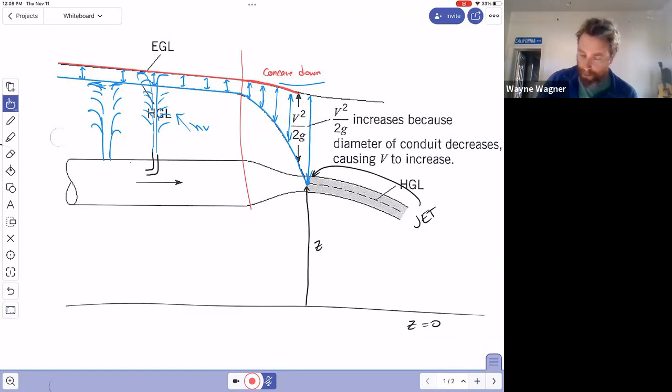Okay, let's see what else we got. Okay, yeah, okay good.

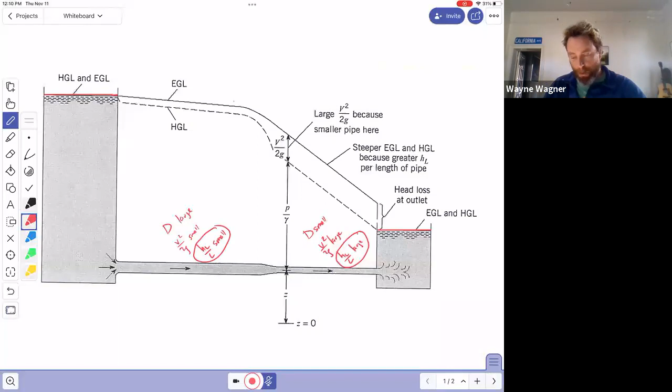We're connecting a shallow line and a steep line. Shallow line. And then, well, for the steep line, I want to draw the steep line right now, but okay, well, let's see. This thing, depending on how that thing curves, will determine the shape of this.

I'm not too worried about you getting the shape of the EGL right here. But the key is, I know I'm going to want it to tie in right there at the surface of the water. But there's a head loss associated with the change in the pipe right here.

We haven't talked about that very much. I mentioned that there should be a head loss right here every time, but this book decided not to put in—I have no idea why. There's also a head loss. These are called the minor losses associated with this contraction right here.

The thing about the head loss associated with that contraction is it gets lost in this line right here. So I don't ever ask people to draw that because it's just hard to draw. But there is a head loss right here, and so that's going to be just an immediate downward loss.

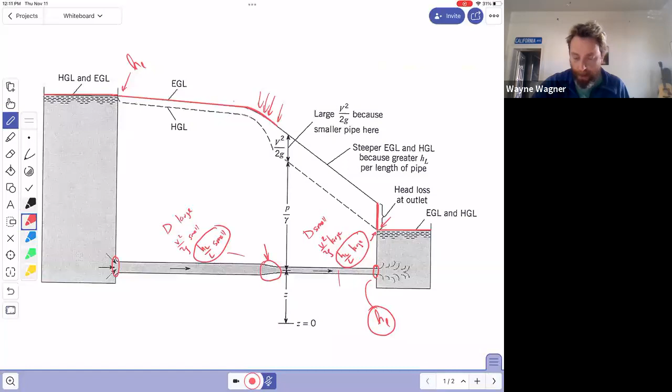So right at the beginning of this, I told you that the head loss due to an expansion was V1 minus V2 squared over 2G. In this case, V2 is the velocity in this thing, so it's 0. So it's just V squared on 2G in this case. That's why this particular head loss is exactly the same as V squared on 2G.

But what I'm really driving at is, we're working backwards a little bit. We're cruising along the top of that reservoir, then we bounce back up, and now we're going to draw that steeper line. We know it's steeper because we're losing energy faster since we're in a narrower pipe, which should tell you something about designing systems. If you can get a larger pipe, you'll lose less energy per unit length. That's a good thing, but of course it costs more to get a bigger pipe, and they take up more space. So those are things you have to consider.

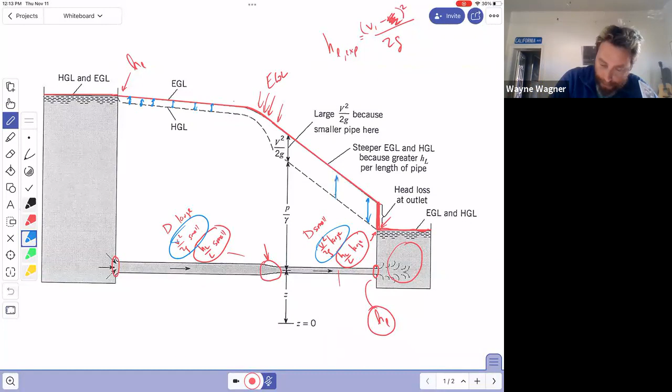Once we get the EGL, the HGL is just thinking about V squared on 2G, small and large. Small over here, so these two things are really close together, and over here it's large. This concavity has to be concave down, and when we get into the math we'll talk more about why that has to be concave down.

So if I asked you in this system, where is the lowest pressure? Where would it be? Surface of the water? Yeah, I guess that's true, you could definitely say right here.

How about between the reservoirs? Where's the lowest pressure? Are you talking about the top of the water again, where the EGL is? No, not between the reservoirs. So between this point right here and this point right here, where's the lowest pressure? Just to the right of the reservoir, right here, maybe up there by the top.

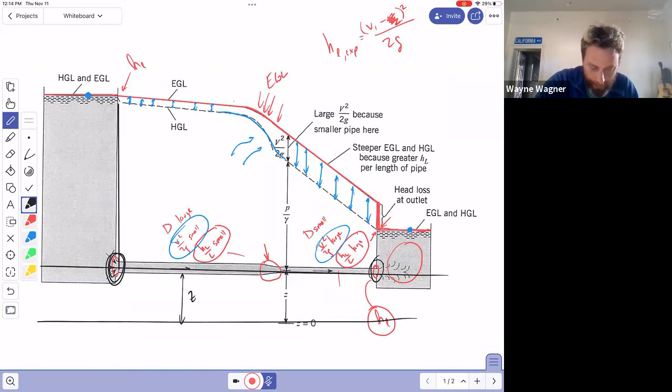Okay, remember, let's draw this again real quick. Here's Z, here's our datum, so here's Z all along the whole system. More or less, obviously not a great drawing. Here's Z, here's P on gamma, and then this one's V squared on 2G.

So where's P on gamma the smallest? The other end, right, this end, okay? So we're losing pressure the whole way through this system. This is where P on gamma is the smallest. Now notice, we're not worried about cavitation here because it's never going to go negative. It can't go negative, right, because the pressure here is 0.

And we're going downwards in this fluid. I guess it could go negative if that velocity went supersonic or something, but that's not really where we are. So yeah, I think that's it.

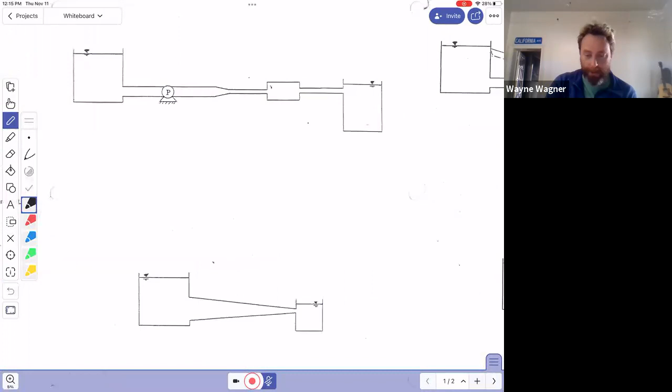If you guys want to play with these, I think I've given these on exams or in class. Usually if there's enough time, I'll do this as a class thing, like try to draw this on your own. But here's kind of a fancy drawing of these. So if you want to play with that, you can try these on your own and then come back and compare them to what we get over here. But yeah, we are out of time.

Anyway, it's one of my favorite classes, but it's also interesting, I never know how much is sinking in with this one. HGL and EGL, until you really get your hands dirty with them, they can be tricky, as long as you just draw that EGL first, I can't stress that enough. And there will be an HGL, EGL question on the final, there always is.